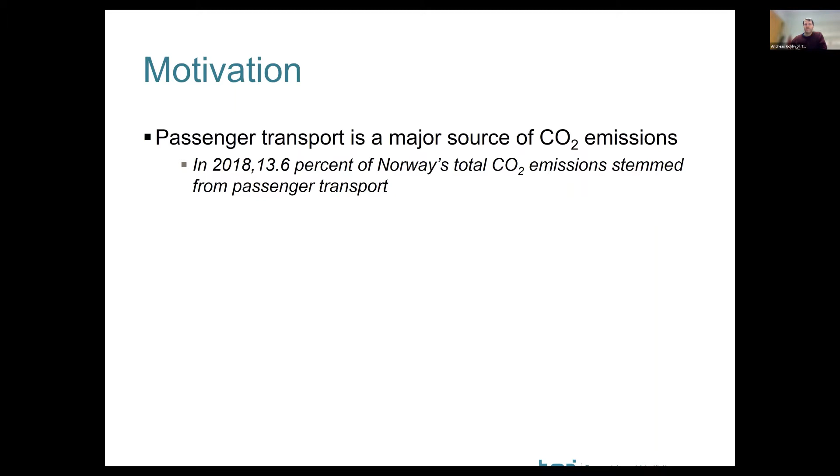As we all know, passenger transport is a major source of CO2 emissions. In Norway in 2018, 13.6% of Norway's total CO2 emissions came from passenger transport. Comparatively, internationally, that's not a very high share, so this is a very important source of CO2 emissions globally too.

So this assessment, or this paper, asks what affects the CO2 emissions of passenger transport. For instance, are such emissions mainly driven by structural factors such as population growth, or are they sensitive to other factors such as technological developments? It's important to note that the present study does not test the effects of individual specific policies, but more of what we can call larger aggregated drivers.

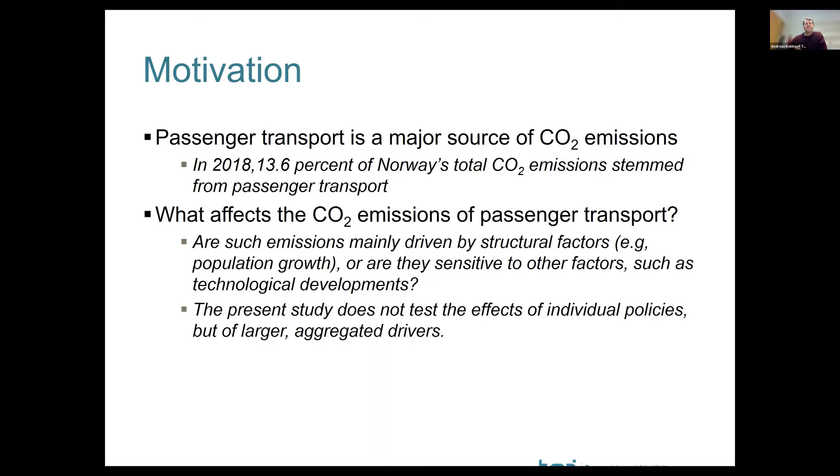So I collect annual data covering the period from 2010 to 2018. These data are collected on population, passenger kilometers (PKM), vehicle kilometers (VKM), CO2 emissions, and energy consumption for a number of transport modes.

And these transport modes include active transport, such as walking and biking, railways, trams, metro, passenger cars—and here, importantly, the data are segregated into a number of subcategories of passenger cars—likewise for buses, and finally aviation.

So as you can see, I have not included data on sea transport. That's mainly due to data limitations.

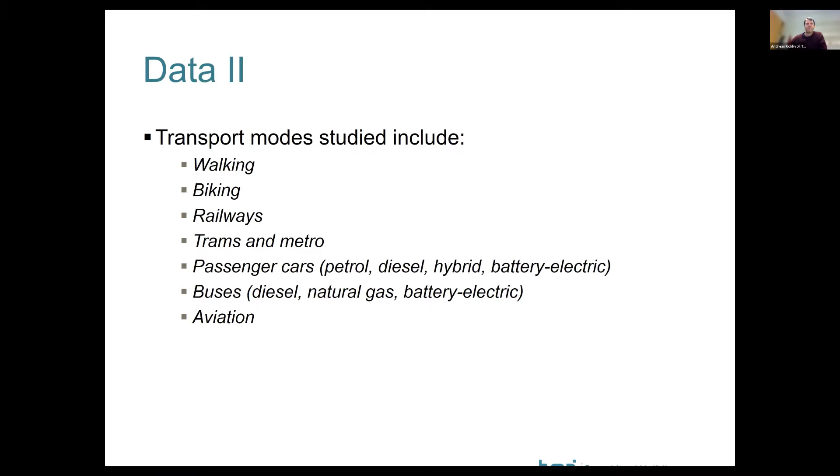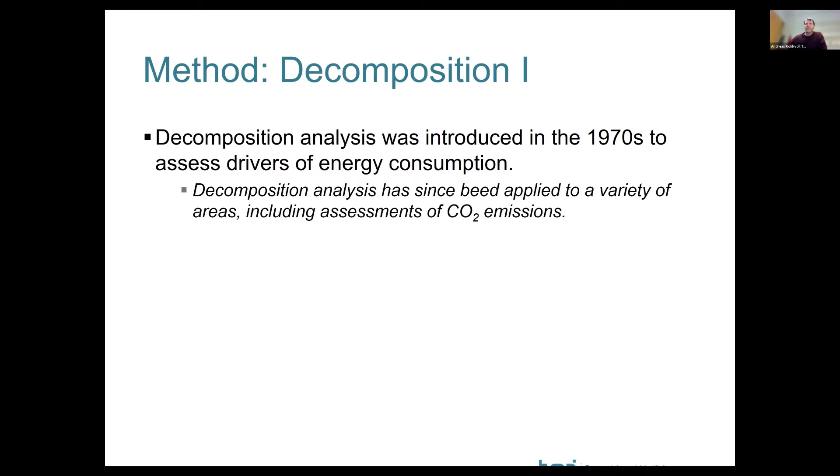I'll say a few words on the methods. What is usually referred to as decomposition analysis is mainly a group of assessment techniques that were introduced in the 1970s to assess drivers of energy consumption. It has since been applied to a variety of areas, including CO2 emissions.

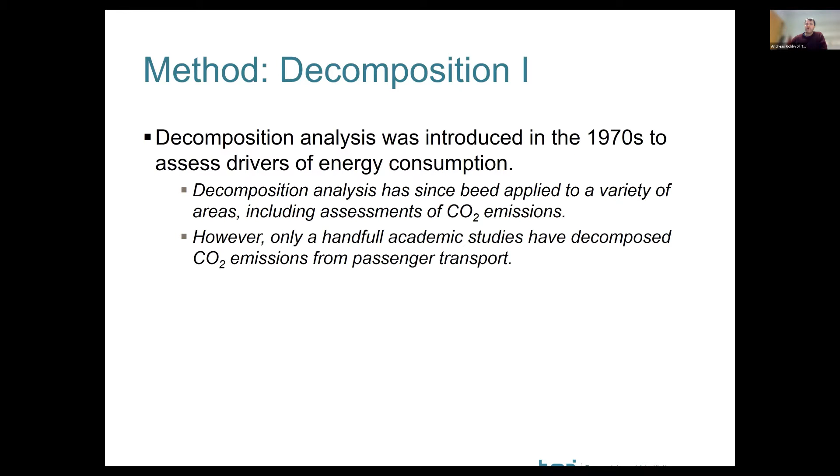However, only a handful of academic studies have decomposed the CO2 emissions from passenger transport. So based on what is called the Kaya identity, which is quite well known for energy economists, I understand CO2 emissions from passenger transport as a function of six components. Firstly, we've got the total CO2 emissions from passenger transport in the area I study, which is Norway.

The first component here is population, and the motive for including that in the model should be quite clear: when the population changes, it will likely affect the CO2 emissions from passenger transport.

The second component here is what I refer to as the volume factor, mainly a measure of the general mobility of the population in Norway. So here we take all the passenger kilometers traveled, divided by population, to get a measure of how far the average Norwegian travels per year.

The next component is what I refer to as market shares. It's perhaps not as straightforward to explain, but here each transport mode gets a score in accordance with its share of the total passenger transport market in Norway. So let's say diesel cars performed 32% of all passenger kilometers in a given year—it will score 0.32 on the market share component. As you can understand, the sum of all the transport modes' scores is 1 here.

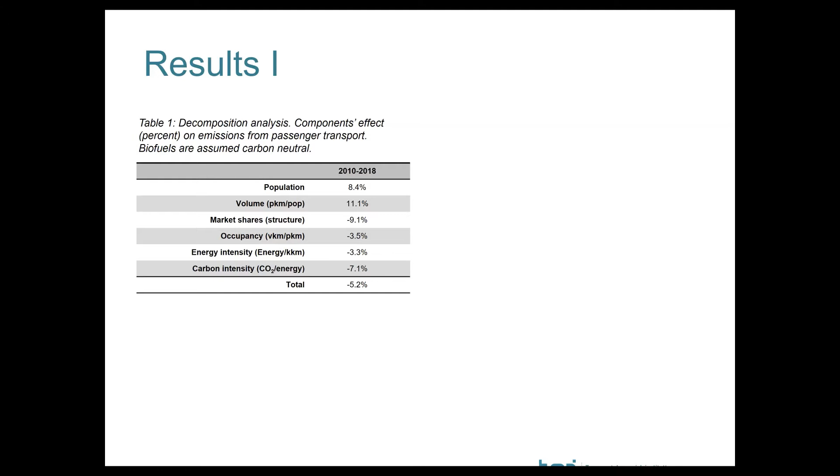I'm certainly not a biofuels emissions expert, so my solution here is basically to run my results using both extremes of assumptions. But let's just assume that the total emissions effect of biofuels is not clear. I would rather go for continuing incentivizing electrification, which might, of course, have some externalities somewhere, but seems like a safer way forward. It's hard to give a lot of recommendations based on these results, but I think it's noteworthy for everyone, any politician, to know that all the results are so sensitive to the assumption regarding biofuels.

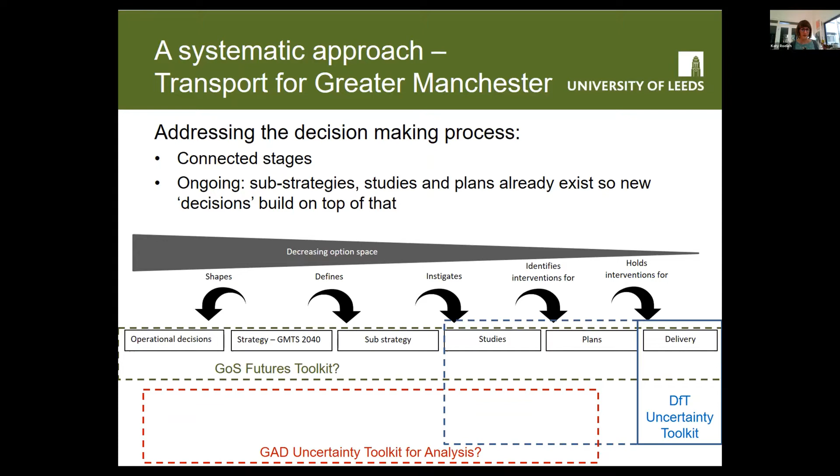And none of the toolkits map across the whole process of decision-making within this example. And the other thing is the problems are very different at those decision-making stages.

So at the strategic level, you might be thinking very broadly about how travel as a whole needs to change to achieve objectives. But at the sub-strategy, you might be thinking, well, how, for example, in rapid transport, would that need to change to allow that system-wide change in travel to happen? At the study level, it might be more specifically what options might achieve the objectives you've set out for that particular area or issue. And then when going down to delivery, you've already chosen your options. How might you make that more future-proof or more resilient to changes in the future? They're very different problems which require very different methods for dealing with different types of uncertainties at different stages.

The different uncertainties and the different kinds of stages and issues require very different methods. So across the suite of scenarios, they had a standard suite at Transport for Greater Manchester, but they used them very differently. At the strategic level, it was much more about backcasting - this is the future that we want, how do we achieve that across this very different range of scenarios? Or which scenarios are not going to allow us to achieve this? What might we need to do to avoid that scenario?

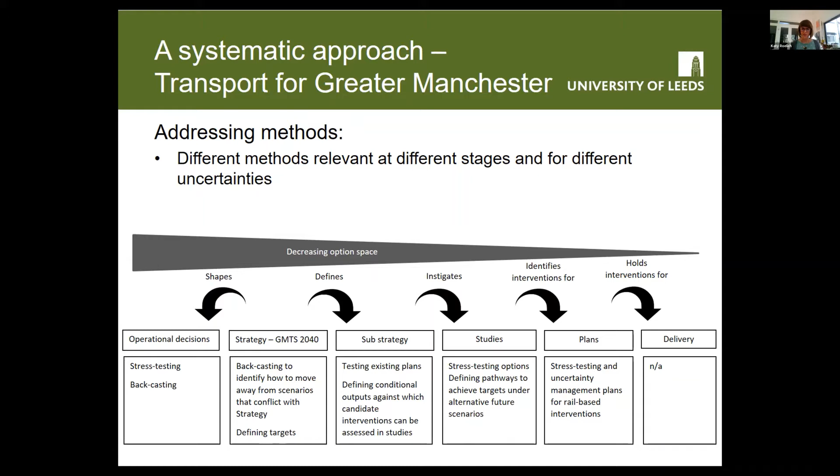Whereas at the studies and delivery end, it's much more about stress testing. We have a lot of options - how do we make them more robust to the range of scenarios that might occur? So using the same resources, but in very different ways - very different methods were used in these cases.

So what we're arguing for is a more systematic approach when dealing with uncertainty that takes into account the realities of decision making, but also the very different kinds of uncertainties and problems we're dealing with. So the first thing we're arguing for is that more effort is made at the strategic end, where the decision space and the option space is much more open, and we have more possibility for accommodating uncertainty, not just trying to quantify and deal with it.

The second argument is that we need to match the uncertainty analysis approach much more carefully to the stage of decision making we're at, the kind of problem we're dealing with, and also the type of uncertainty. There needs to be a much clearer mapping across between that. And the third thing is that we need to get better at linking stages of decision making. So if we've done some analysis at the sub-strategy level looking at uncertainty associated with achieving specific objectives, how do we carry that analysis through when we're appraising options, and not assume those are completely separate things?

So just to conclude: ignoring uncertainty or avoiding decisions will slow decarbonisation, so we absolutely can't do that anymore. Lots of methods for dealing with uncertainty exist, but there's not a great deal of clarity about when to use them, how to use them, and in which particular circumstances they're most appropriate.

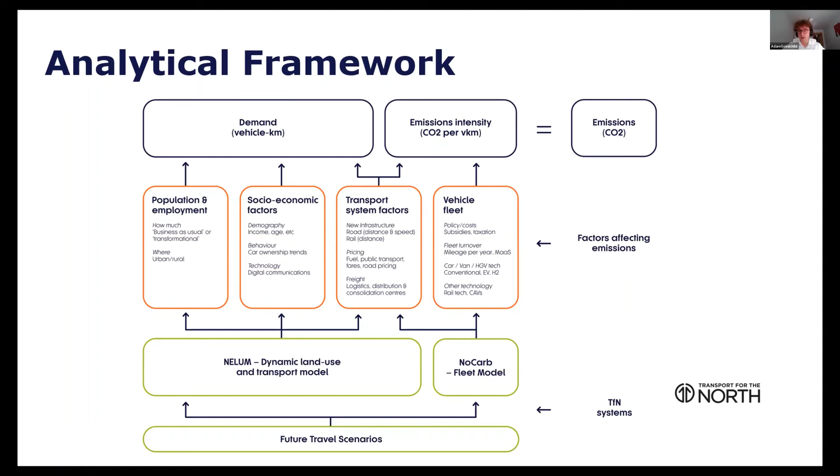The Northern Carbon Tool, or NoCarb for short, is really just a highway fleet model with functionality which allows us to calculate emissions combined into that. We take base fleet data, new sales by scenarios, and scrappage curves, and combine all those to get projections of what we think the future fleet will look like.

Base fleet and scrappage curves come from historic data, while our new sales and scenarios come from our future travel scenarios. These are all based upon various different assumptions about what we think policy might look like, which varies across the different scenarios.

We combine these with speed emission curves and our demand speed curves - stuff about total vehicle kilometers traveled and how speed is distributed, because different speeds produce different levels of emissions. This combines to give us calculations for road CO2, which is then merged with simplified bus and rail, giving us our final reporting CO2 and demand trajectories.

One thing to stress about NoCarb is our zonal inputs are very soft coded. We do this for the north of England, but this can be taken and done for any region effectively - all you need is a highway model. We use Saturn, and we've developed a tool which allows Saturn highway models to interface, converting that data into useful forms for NoCarb. So that's all been taken care of.

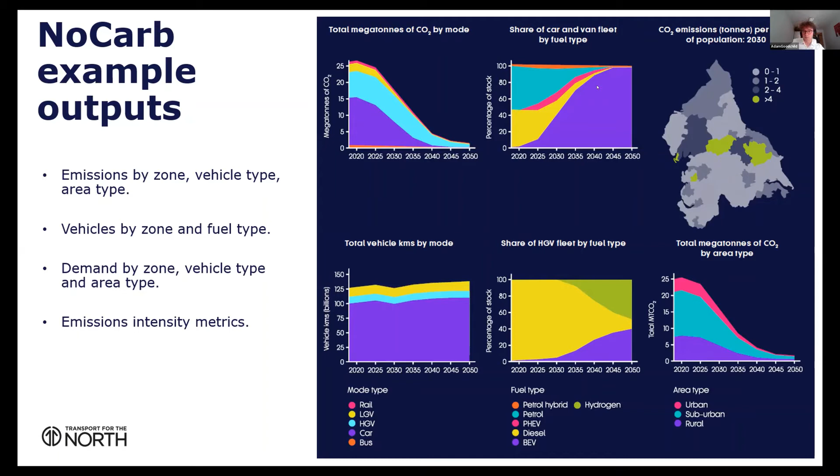One thing we aim to do with this is incorporate it into our transport planning process, which we're currently in the starting phase of doing. So say you have a highway model reference case and a scheme represented in a highway model - we put those into NoCarb, and we can get CO2 impacts which come out of these various different highway schemes.

We can compare this to the decarbonisation trajectory and see what kind of policy might be needed to compensate for the introduction of a new scheme. This all feeds back into our business case, and if the impacts might be too severe, we can give recommendations to delay or halt a particular highway scheme.

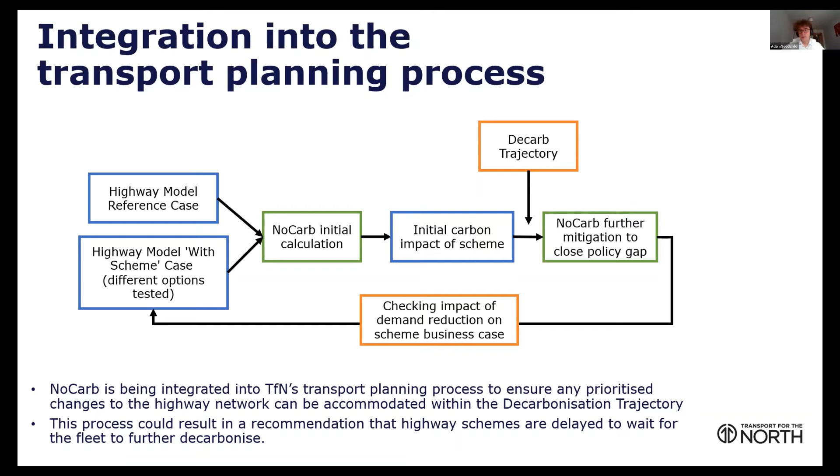Something else we're developing is the electric vehicle charging infrastructure tool. This aims to create a distribution based on future projections of electric vehicle demand of where we might want to place different electric vehicle charging points. From this, we hope to assist local authorities in working out exactly how many charging points they might need, where to locate them, and whether they need to be fast, rapid, or slow.

We even hope to be able to produce more nuanced data with this, such as perhaps the best locations to be placed on the major road networks, information of that nature.

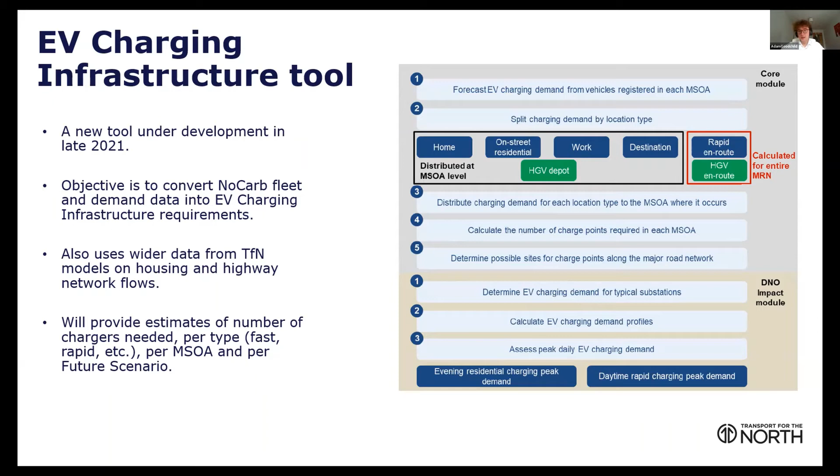We're very much about maximizing the investment value for these tools. Everything at Transport for the North is developed, wherever possible, to be open source with publicly owned IP. This allows anyone to come in and take advantage of our tools. We share these with local authorities and other subnational transport bodies, all with the aim of building a common analytical framework.

This maximizes taxpayer benefit in terms of value for money, and it also helps make the assessment scheme at the national level more efficient, because information we submit for review there, if it's all using a common analytical framework, makes that process more efficient as well.

One thing we want to stress is this is going to be very collaborative in nature. If we're sharing this, we very much expect people to go away and make their own developments and improvements based on their own regions, or just general improvements. We'll end up with diverging and then remerging branches of the tool, which is mutually beneficial for everyone involved.

So the next steps for TFN are, well, we've just gone through our decarbonisation strategy consultation process, opening it up to consultation with the public, getting feedback, and we're now updating our strategy and making changes to the model.

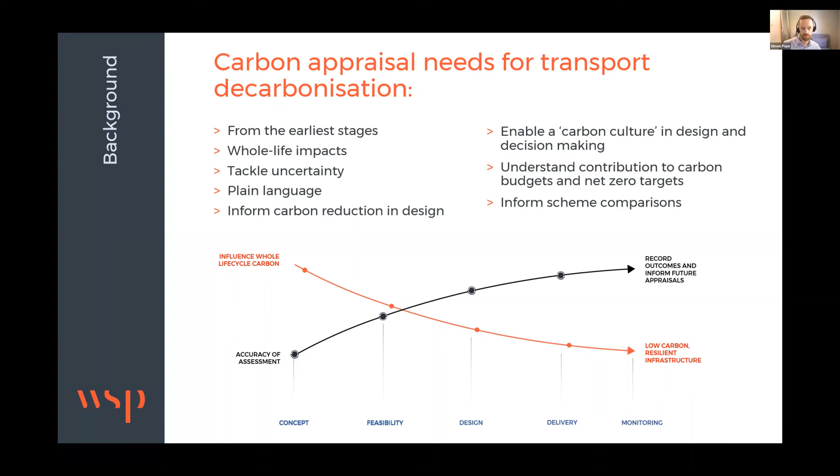But we do also cover resilience - it's the other half of the climate emergency, and not something we'll focus on in our presentation today. We've drawn on the latest EIA guidance to look at appraising how schemes will operate under changing climate conditions, and how their own impacts might affect other receptors, so that we can start building adaptation in from the very earliest stages of scheme development.

All of these appraisal tasks' outputs are presented in our report template for project level appraisal summaries, giving a concise, clear and visual communication of impacts. But we can also collate and analyse these at a programme level using our digital platforms. These appraisals are then used to challenge design and decision making from the earliest stages, supporting decisions on the type of infrastructure to deliver and how to design it. But also these bottom-up scheme appraisals, in conjunction with the top-down baseline and pathway analysis, can support an understanding of what the gap is to decarbonisation commitments and what interventions and policies might fill it.

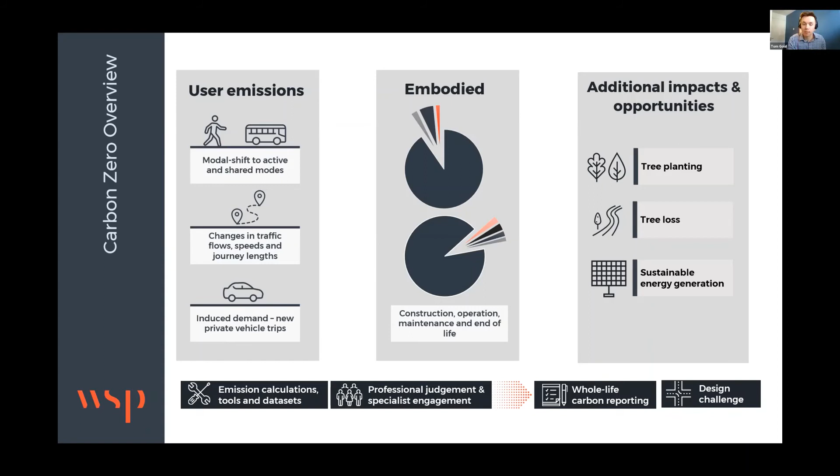All of these appraisal tasks are underpinned by a few key principles. Wherever we can, we appraise quantitatively, but proportionately, and while appraising the full impact, we supplement this with qualitative appraisal. All our appraisal draws on the expertise of our specialists and those who understand the schemes and their impacts best - the transport modellers, the designers, the planners, the environmentalists, and more.

In simple terms, it's the sum of these three categories that forms the net impact of the transport scheme. Transparently breaking down the impact into these three categories gives us a framework to make decisions that maximise carbon performance by maximising the benefits and minimising the impacts. So the best performing carbon scheme will realise really strong user emission benefits through, notably, modal shift, while having negligible embodied impacts. They may also have some additional benefits from things like tree planting, embedding this kind of thinking in decision making and design to enable a carbon culture that helps shape carbon outcomes.

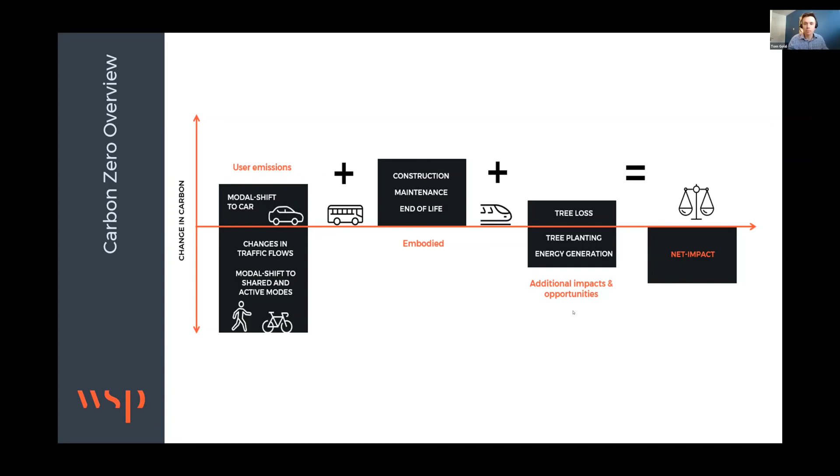But to put this in more tangible terms, I thought I'd present two quite different examples. Firstly, we take the example of a major new road scheme - it could be a new bypass, a significant new highway that's typically proposed on a predict and provide basis, generally to provide capacity for predicted traffic growth or current congestion.

On user emissions, this might actually have some carbon savings potentially from traffic efficiencies - it might reduce journey lengths and reduce congestion and associated stop-start traffic. But improvements for private car users will almost certainly have an induced demand that increases overall car use. Embodied emissions for a scheme like this can be quite significant, as well as the ongoing maintenance for things like resurfacing every 20 years or so. A scheme like this may also have some tree loss, and probably would mitigate this through tree planting, and it might balance between those two impacts, but in the context of a scheme like this it's probably unlikely to be too significant on the overall impact.

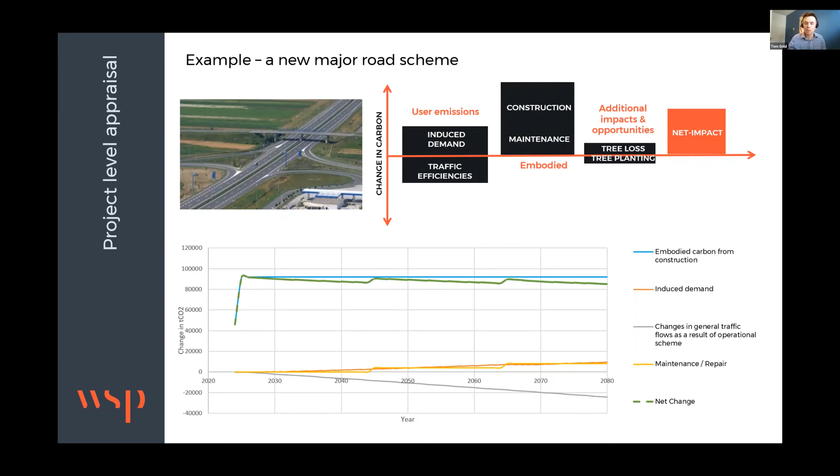So an opposing scenario: take a cycle lane, for example. This could be expected to support a modal shift from car to cycling that reduces road user emissions. But embodied carbon, particularly for a segregated cycle lane where you've got plenty of new surfacing and concrete for new curbs, can erode some of those user benefits.

A scheme like this may also have opportunities for some tree planting on site. But overall, you would expect a scheme like this to give a carbon benefit over an appraisal period. It does still have a payback period, and in this case it's about 10 years, for the user emission benefits to outweigh the carbon debt from construction.

So this should raise questions about whether it's an over-engineered solution, and whether a different design philosophy is needed. Can the payback period be reduced by choosing a solution that requires less materials? That might mean road space reallocation instead of widening the highway.

But you also need to factor in the limitations of a scheme-level appraisal such as this. In isolation, schemes like this may only come out with very minor carbon benefits, or even adverse ones, where there's a significant level of embodied carbon but relatively minor uplifts in active travel. In reality, though, there are potentially much greater in-combination benefits, particularly where a scheme like this is delivered alongside other benefits as part of a coordinated strategy.

But what we've got with Carbon Zero really is an ability to understand these issues and have these conversations from the earliest stages, when, as Simon said, there's the greatest ability to influence.

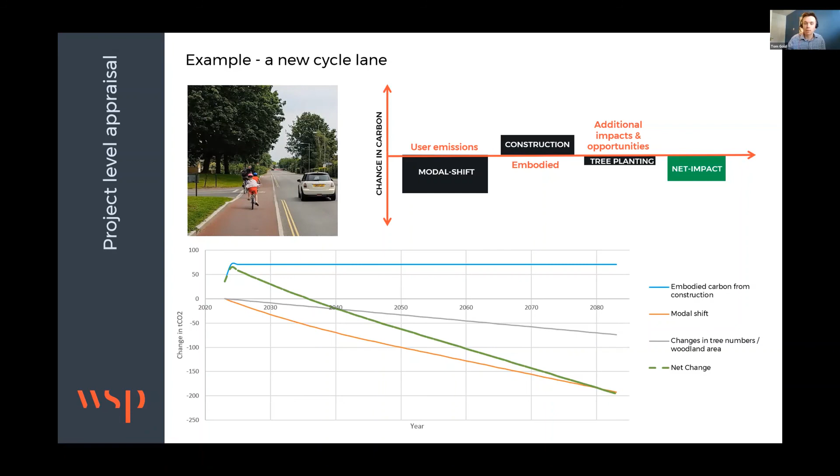These insights from appraisals need to be communicated in a clear, concise way if they're to influence decision makers. Our Carbon Zero appraisal framework summaries have been designed to do this.

We try to present the results in a really consistent, clear, single-page template. On that we've got some narrative, data visualizations, and metrics to support understanding of what a certain level of tons of CO2 impact means. We also reference some of the uncertainties and influences on likely future trends for this impact.

But we can then also bring these appraisals into a web portal so that our clients can view them in one place, understand the aggregated impact, and see how different combinations of schemes perform and compare.

So once individual scheme appraisals have been quantified, we can use these to compare the scale of impact at, say, a programme or a portfolio level. Now, in doing so, it's important to recognise the part that even small schemes can play in meeting our net zero targets.

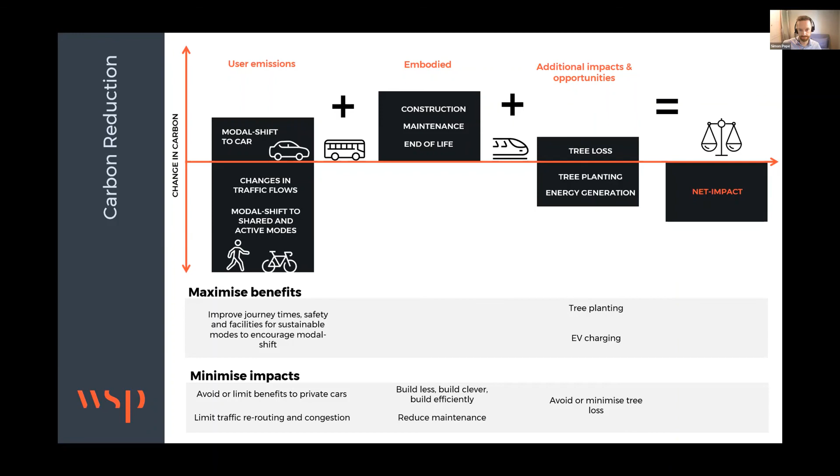So just to give you a flavour of how we applied our carbon zero appraisal framework in practice, this is a selection of some of the projects we're working on.

It has enabled us to review transport authorities' activities to determine whether they're consistent with the climate emergency, which is something we're doing with Somerset County Council at the moment. This can inform how current activities influence their emissions and how it fits in the context of carbon targets and budgets. This is particularly important for those with earlier carbon neutral net zero targets, who need to be accelerating action that goes above and beyond DfT policy, which has its sights set on 2050.

We're also supporting authorities in appraising the carbon impact of portfolios of schemes put forward for funding bids. This fulfills DfT's growing demand for understanding carbon reduction within their allocation of funding, but it also helps identify risks and signpost actions early so we can maximise carbon outputs from those programmes.

But then moving into the delivery of programs such as that, we've embedded carbon zero in scheme development to shape design and support business cases. On the Leeds Transforming Cities Fund at the moment, we're doing this across a really large programme, appraising whole life carbon impact, making design decisions and supporting programme level review of how different schemes perform.

So it's all well and good understanding the impact of our decisions, but ultimately it comes back to a culture of carbon and the willingness to make those decisions, even when the evidence points us to unpopular outcomes.